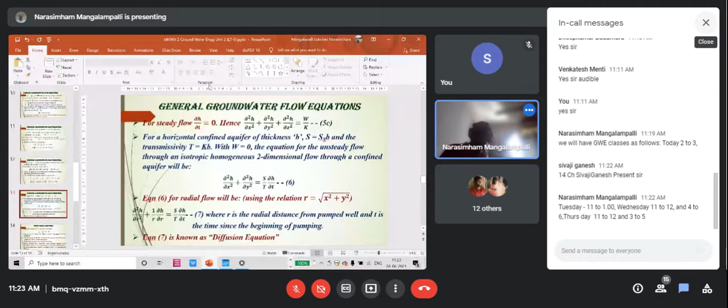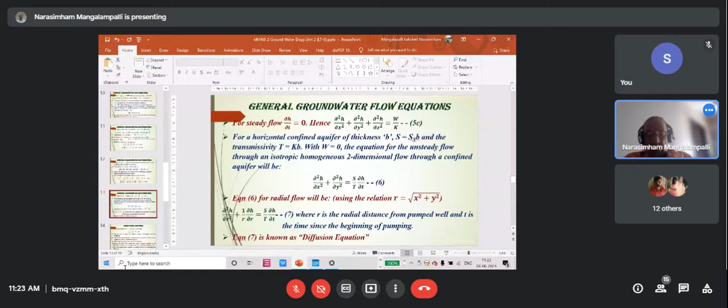Okay, so that is the schedule. Now let me proceed to the class. So in the previous class, we have considered the general groundwater flow equation. So for a two-dimensional case, so this is the equation:

dou square h by dou x square plus dou square h by dou y square is equal to S by T dou h by dou t, where h is the piezometric head and S is the storage coefficient and T is the transmissivity. This is for confined aquifer.

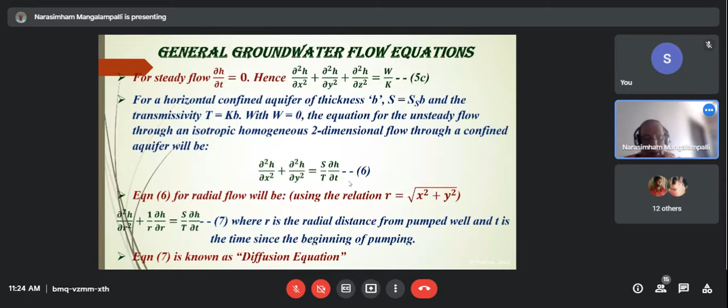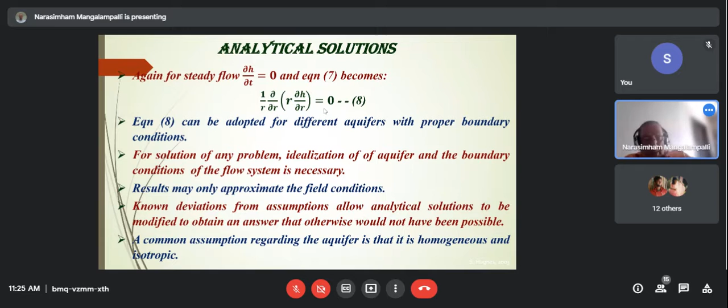So this equation, for steady flow and considering radial flow, will be taking this form: 1 by r dou by dou r of r dou h by dou r equal to 0. So now the next step is to solve this equation analytically.

Now normally when we consider any aquifer, aquifers can be considered to be infinite in areal extent, if not, boundaries are assumed to be impermeable, such as underlying or overlying rock or clay layers, dikes, faults or valley walls, etc. So that means if there is any impermeable layer, then the boundary will be stopped there. Otherwise, we will consider it to be an infinite extent.

Or there may be highly permeable layers also. These highly permeable layers may be surface waters, which are in contact with the aquifer. Now, for example, consider a groundwater joining a river. So what happens all the time till the water reaches the river water? So it will be flowing through the aquifer. So on the top of it, there may be ground surface, and on the bottom of it, some impermeable layer.

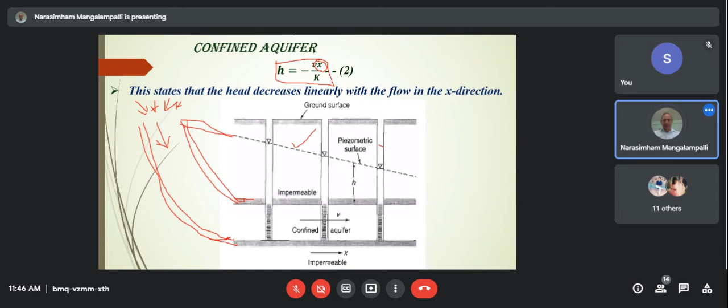So our assumption is here: this is how H is equal to minus Vx by K. So this is the analytical solution in case of confined aquifer.

Now let us consider unconfined aquifer. Now solution of Laplace equation for this case is not possible. Laplace equation is what? This is Laplace equation. So solution for this is not possible for the unconfined case.

What is the reason? The reason is, see, this is your boundary, the original water surface. Now what is happening with this boundary? From time to time, this boundary changes. As flow proceeds, this boundary will change, and that boundary itself is an unknown one.

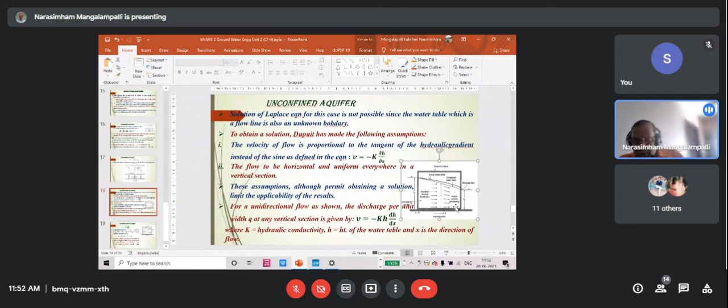This is the first assumption and this is your second assumption. These assumptions, although they permit obtaining a solution, limit the applicability of the results, because it is not accurate, only an approximate solution. So for a unidirectional flow as shown, the discharge per unit width, see, this is velocity.

This is velocity. So if you want to get discharge, you have to multiply this velocity by area. For area, what we do is we replace the area by considering unit width, so depth is h into 1. So therefore q is equal to minus k, h into dh by dx.

So dou h by dou s is replaced by tangent, as I told. So this is the solution for the case of an unconfined aquifer. Here K is the hydraulic conductivity, H is the height of water table, and X is the direction of flow. So this is about the unconfined aquifer case.

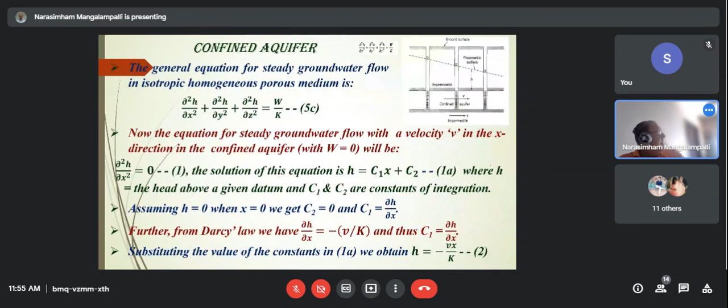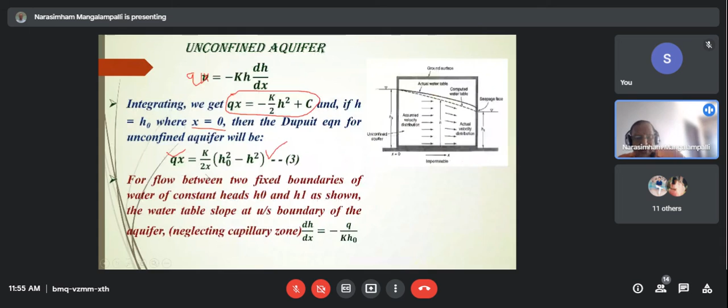Steady unidirectional flow into an unconfined aquifer. I think this X is not there. You just verify whether this is correct or not. So what I suggest is you go back and repeat these two simplifications. Right? So this is the unconfined aquifer case.

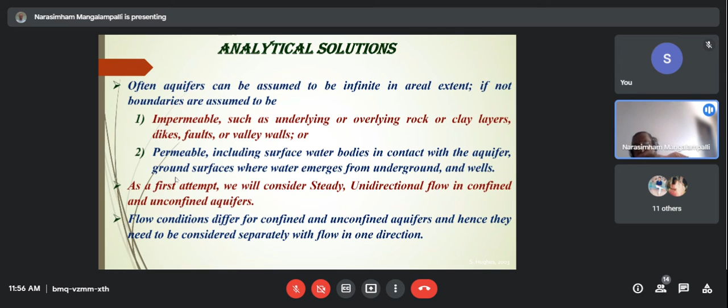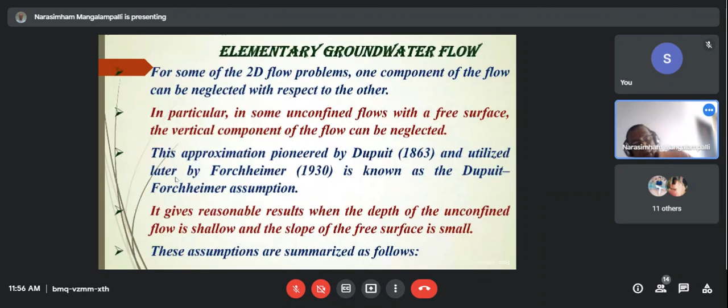So we have considered confined aquifer and unconfined aquifer. According to your syllabus, this is all in unit 2. In unit 2, the general equation, derivation of the general equation, and the assumptions of Dupuit-Forchheimer, the general differential equations governing groundwater flow, and analytical solutions. So with this, your second unit is now completed.